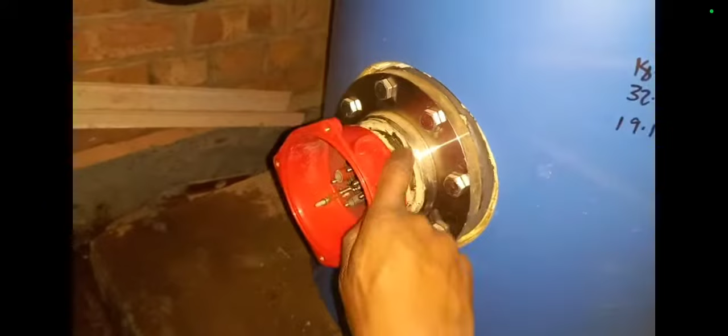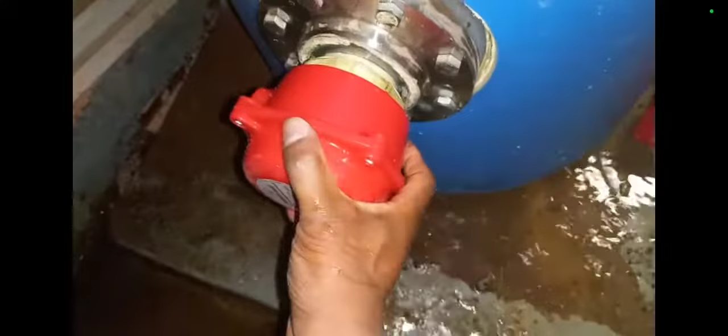I was draining down this calorifier in order to change a three-phase element, but it was taking a bit of time, probably half an hour to an hour, and it was still not even there yet, so I just decided to snatch it. I had my Loctite on here and my jointing compound already prepared.

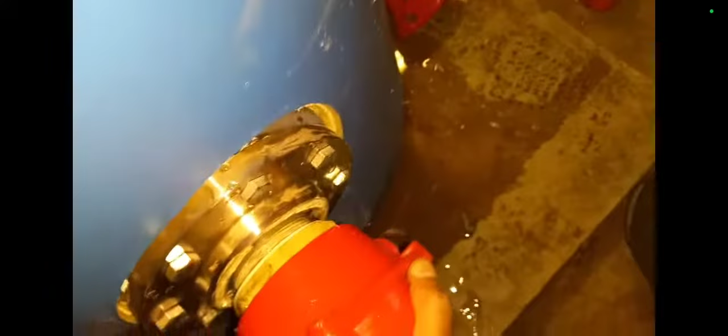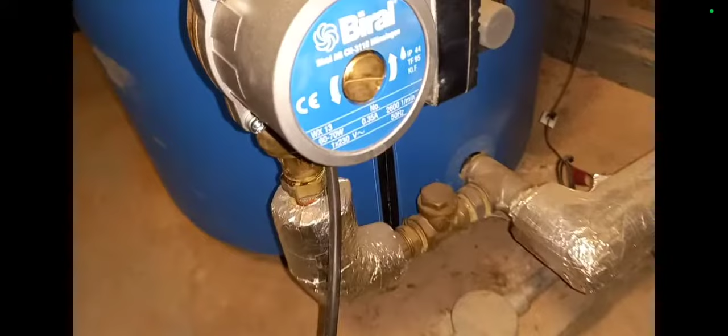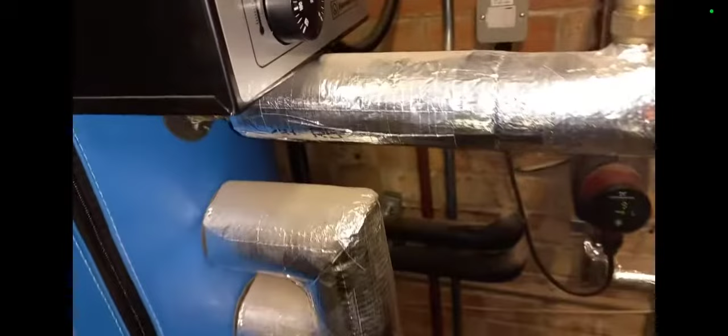Alright, here's the destratification pump. The destratification pump is there to create an even temperature between the top and bottom of the cylinder. Some people call it top to bottom pump. A few more components, PRV out there, and there's my isolation valve. Let's hope they hold. I don't know if they were holding, to be honest. As you could see, I had been draining for a little while. Maybe if I just waited a bit longer.

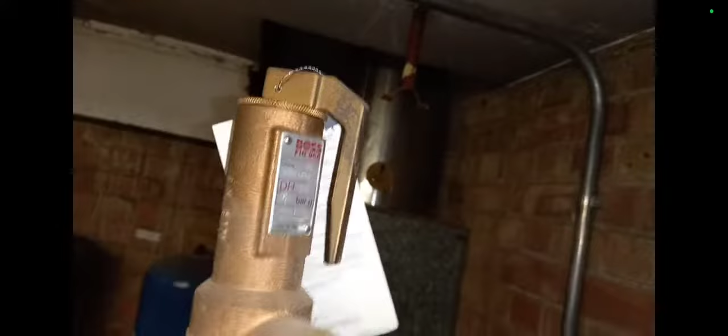And yeah, there's a fuse and also an overheat stat in. This shows you what there is. And then here is the Hamworthy cylinder details. 292 litres. DN25, diameter nominal 25 for the PRV. And there it is, going down there.

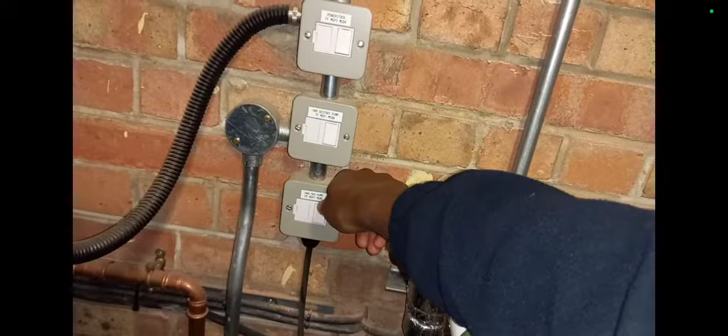So I isolated the power to the D-strat pump and to the return pump. So there's the return pump over there in the control panel. Gonna switch things off as well. It's good to have 2 points of isolation if possible. So when you're doing safe isolation, try to have 2 points of isolation.

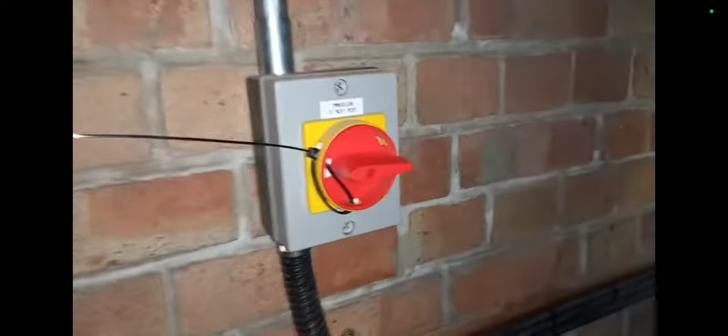And it's good to label up things when you diagnose that something's not working, say 2 or 3 boilers in a plant room. There's my second point of isolation. Try to put labels on things for other engineers when they come into the plant room.

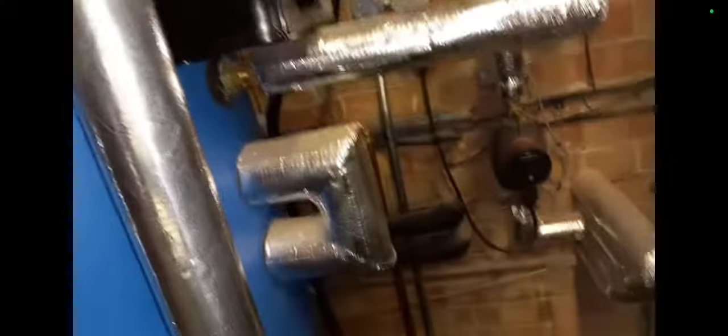Okay, time to isolate our valves. Try to remember to open up valves slowly when reinstating, instead of throwing them open. Closing them can kind of be quick, but opening them up, I forget at times when I open up valves very quickly, and it can cause a big shock to the system and things can pop. So just try to remember when reinstating to open valves slowly.

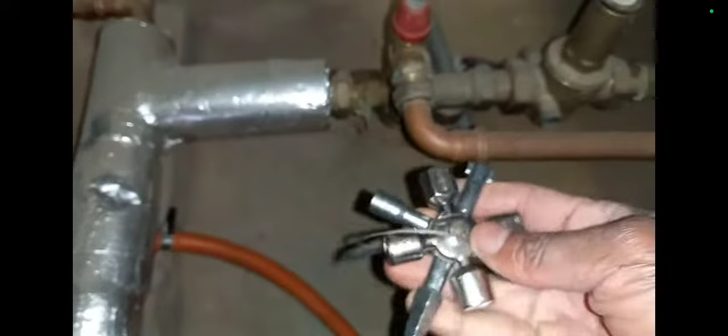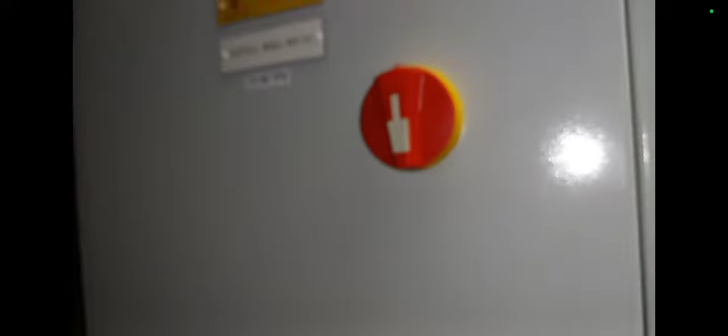So there's a few ways in some of these control panels. Some of the doors and the isolators actually work. So in this one, it's just underneath. You just give it a little poke, and then there you go, you get inside. My immersion heater, I'll flick this off. Even though we've got the local isolator off, I'm going to just switch this off too. Against the left, next to my neutral bar. That's off now. We still need to check for isolation.

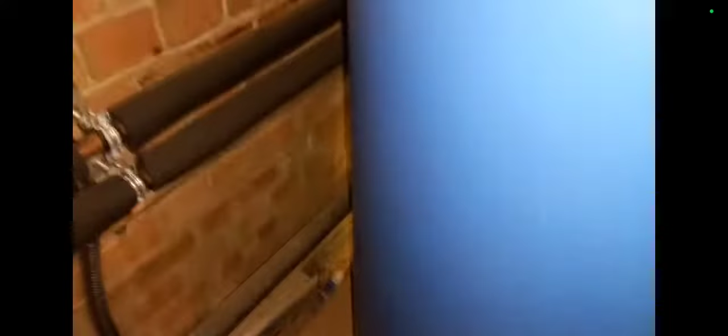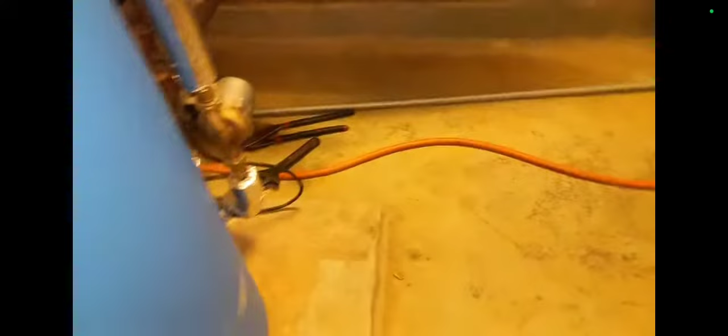Notice I've got my boots on. When working on electric, try to make sure you've got a decent pair of rubber boots on. I'm also using my volt stick, and I'm going to test my volt stick first to see if it's actually working. I've got 2, one's not working. Notice there it's working. Okay, great. I've tested it on a known source. And I'm going to go in here and just make sure there's no power.

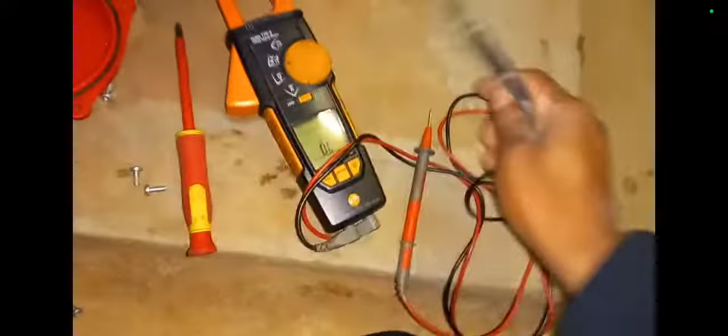And then I'm going to get my multimeter out. I should have a proving unit for my multimeter to make sure that my multimeter works. My proving unit is in the van, but I could just prove that my multimeter is working another way. It's better to use a proving unit, okay? But I'm just showing you, if you do not have a proving unit with you, this is a way that I test my multimeter.

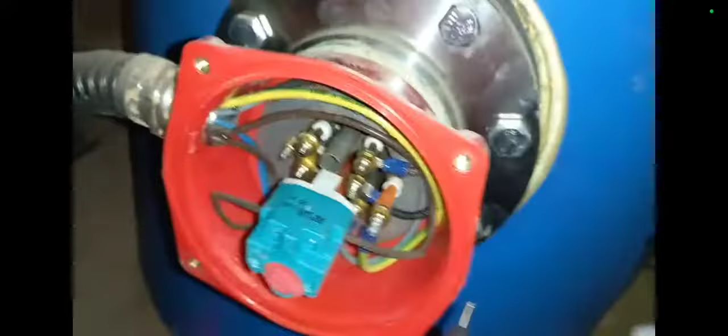Okay, this is another way of checking that my multimeter is working, because the leads may not be in, the leads may be damaged. Make sure that your multimeter is working. I'm convinced that it is. You should still check after you've tested that there's no power somewhere, or that there is power somewhere, etc. Just check that your multimeter is working afterwards.

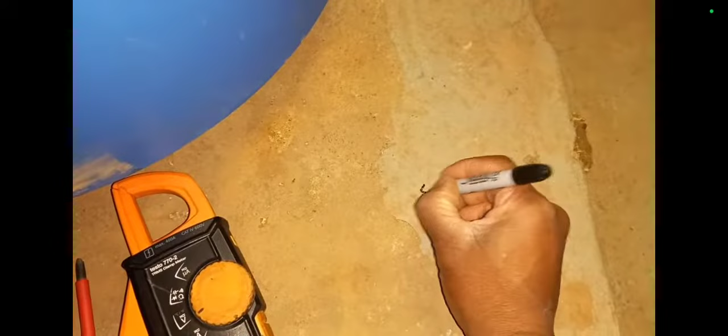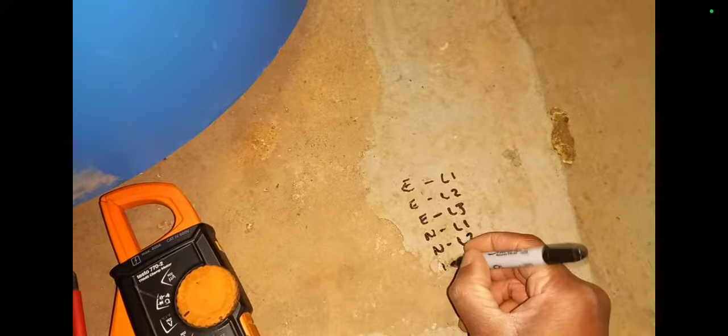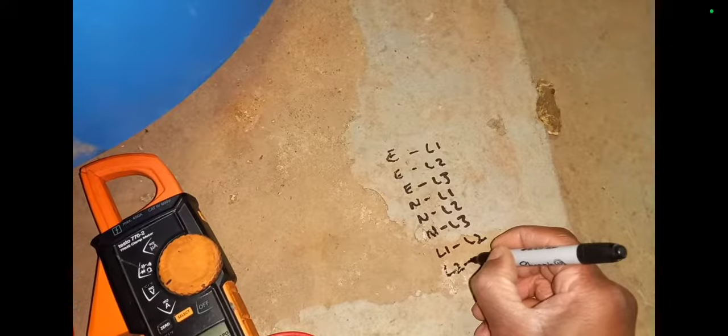10 points of isolation I'm going to write down here. Here we go. So your 10 points of isolation when you're working on 3-phase. Okay, so I've got my earth. I'm going to test from my earth. You want to call it out? Earth to live 1. My earth to live 2. My earth to live 3. My neutral to live 1. My neutral to live 2. My neutral to live 3. What next? My live 1 to my live 2. Live 2 to live 3.

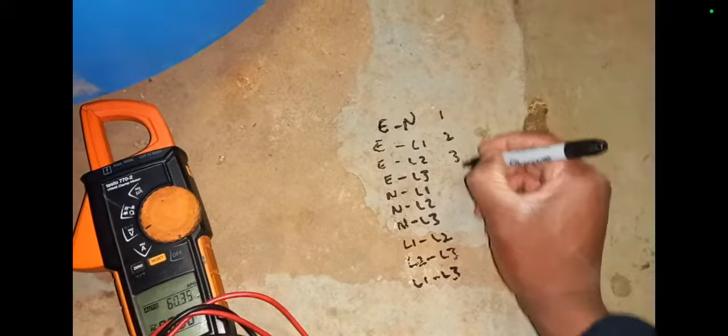Live 1 to live 3. 1, 2, 3, 4, 5, 6, 7, 8, 9. I'm missing one. What is it? Can you guess it in time? My earth to neutral. So this is my 10 points of isolation. 1, 2, 3, 4, 5, 6, 7, 8, 9, 10. So remember, that's how you check it's working.

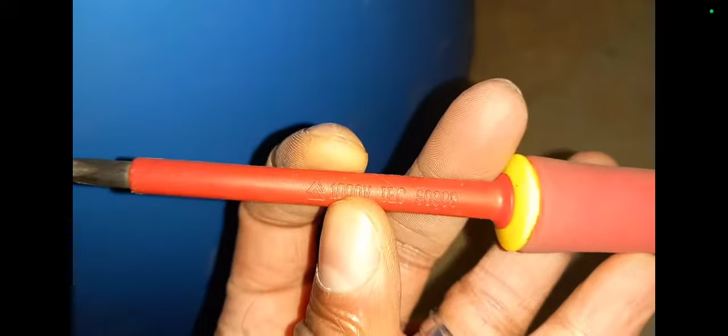So with your hands, try not to use your bare hands when you're working on electric. Try to wear gloves. And also use VDE rated screwdrivers up to 1,000 volts. I've got a cheap pair of Drapers. And also side cutters and long nose pliers, you want them to also be VDE rated. And treat things like they're live, okay?

So that's locked. Also the plant room's locked, okay? So I'm locked in the plant room, so nobody can come in so easily and turn things on whilst I'm working. All right, so 2 points of isolation at least, and on the panel I've turned it off. I've removed the leads from the thermostat. I've locked the door to the plant room so nobody from the public can walk in and just turn the power on.

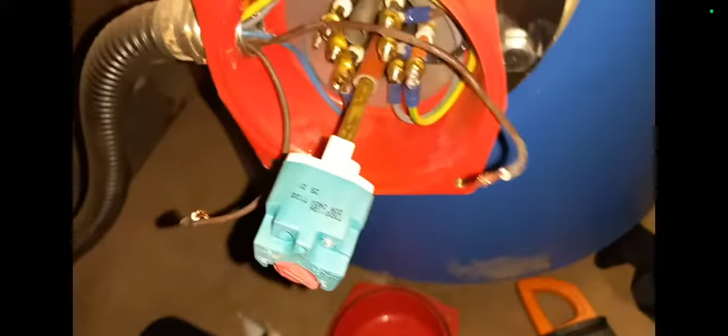The powers that be in the building know I'm in there. Always let someone know that you're working. When you're on your own, make sure that your partner or your colleague or somebody knows that you're somewhere on your own, and if they don't see you by a certain time or hear from you within a certain amount of time, there's nothing stopping you from doing your extra measures when you're doing safe isolation.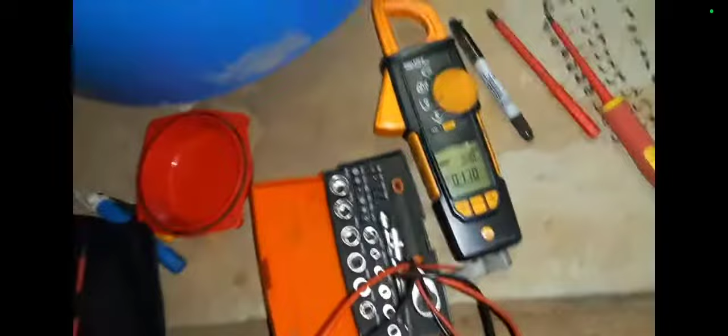So I don't know if you can see my wires being marked, so take pictures of your wires and mark them as well clearly so that you can identify them, or use tape. I think scribes with a marker pen can help at times, but you can wipe those off. So here I am checking my earth to neutral, and that's the voltage I've got there.

So I'm going to write down what I had. So 0 volts. Earth to line 1. We're going to call line 1 up here, this one at the top. Earth to line 1. Voltage 0 volts. Okay, I've checked the other ones, and now I'm going to swiftly move on.

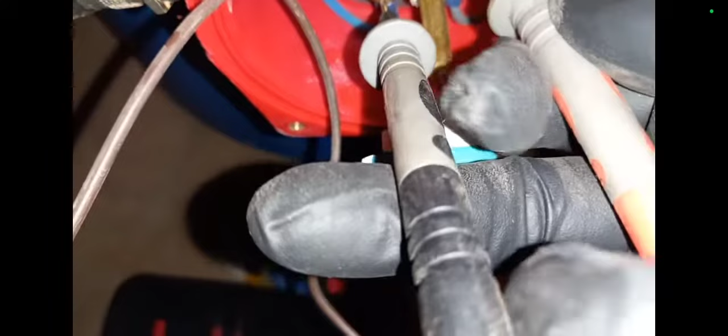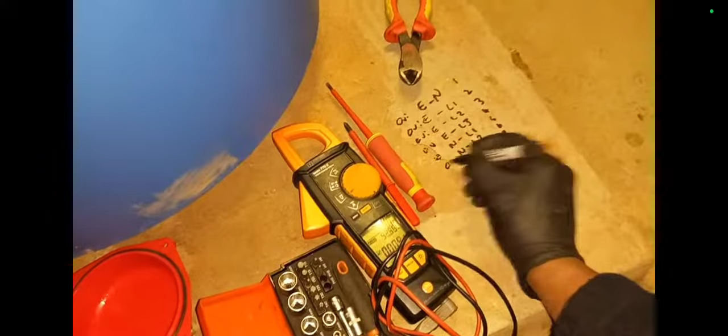I'm going to check my neutral to my live 1. So you get the gist of me checking the other parts. So I've swiftly moved on now. So I'm checking neutral to live 1. And then I'll do neutral to live 2. And neutral to live 3. So I'm continuing to check for safe isolation. Then I write down what I found, and then I'm going to do live 1 to live 2 and so on.

So I started whilst there was still water in the system. As there's still a bit of weight in the system, it's better to just loosen up the element whilst the cylinder's still heavy and you've got something to work against. I'm moving all my parts out the way to stop them from getting wet. There's one I prepared earlier. So here I have my Loctite on there, my paste.

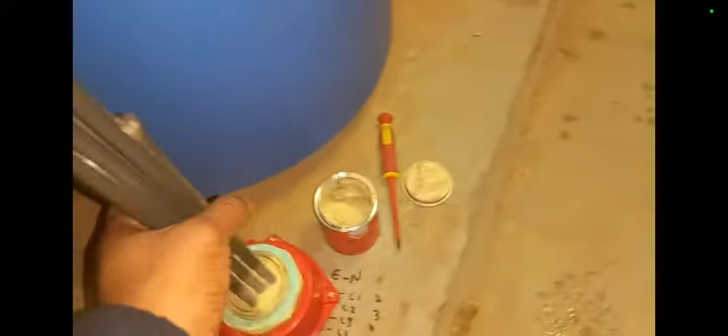Okay, now fast forwarding again to having the unit in situ, the new element. So I've got the system filling up whilst I am going to wire this up. I have wired up my phases and I'm tightening up. A nut driver would be better for this, but this is what I have on me. I don't have any nut drivers, so I'm making sure they're all tight.

So I didn't use any new connections. I can't remember the name of these crimp connections. So I've used those. I'm trying to make sure that the phases don't touch each other or the earth touch anything.

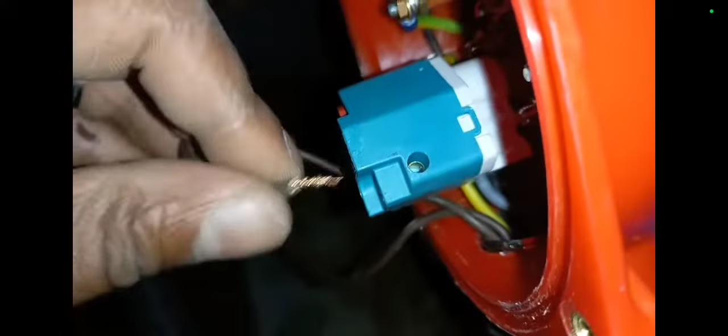Okay, and now when putting in this wire, I'm going to just see how deep it goes inside, and how much space there is, how much movement there is, if it's going to make a good connection or if it's going to just fall out. So the hole looks wide, got a big diameter there, so I'm going to strip this wire back and double it over. So can you see, trying to double it over and pull it inside so that we have a good termination.

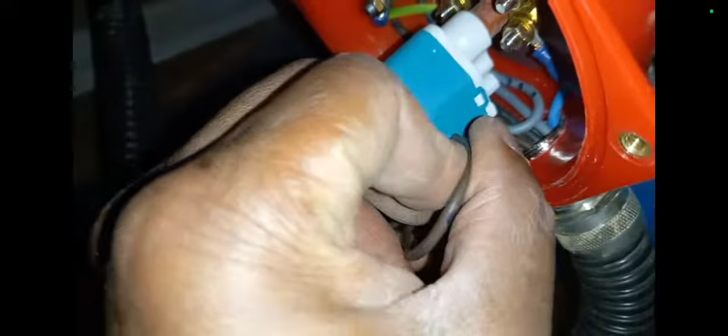I don't want any copper showing, I don't want any of the wire showing on the outside. So here we go. I've got the left in, left and right, making sure it doesn't come out, and also that I don't see any copper showing. So I'm just doing a last little recce to check. Look, I just found something loose. So always double check. But before I turn the power on, I'm going to just check what it says. Okay.

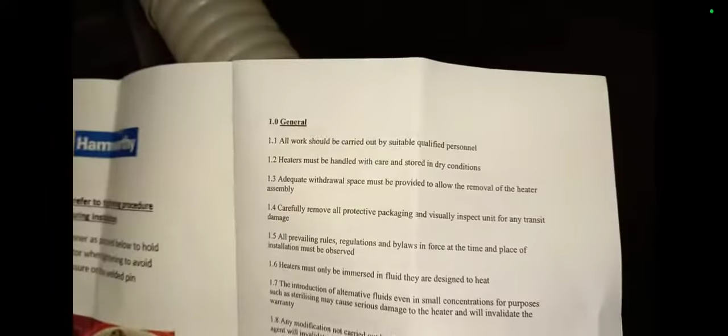Alright, use a spanner. Okay, I used that spanner. I didn't use a nut driver, but a nut driver would probably be more convenient. All work should be carried out by suitably qualified personnel. I hope that's myself. Heaters must be handled with care and stored in dry conditions. You can read along on pause if you want to read any of this. Okay, just skim read it very quickly.

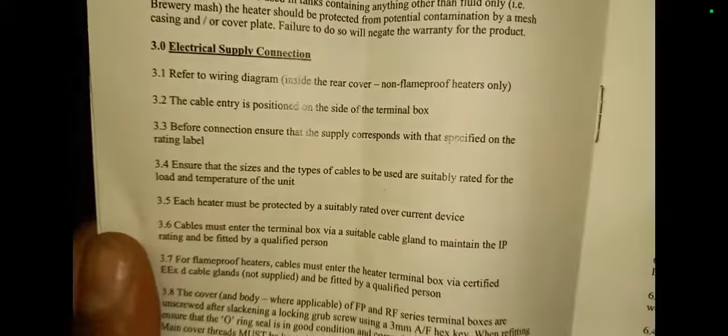Sometimes you can learn things from the manufacturer's instructions. Electrical supply connection. I think when installing, instructions are ultra important to read. Obviously, whilst carrying out maintenance work, instructions are important. But when you're installing, that's where it can all go wrong. Because you're the installer, if you install it wrong, you can have problems for the person afterwards.

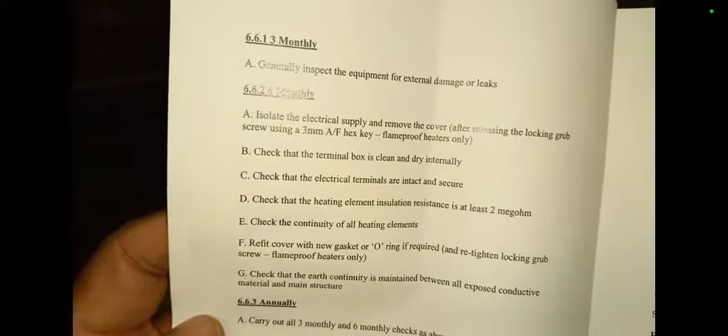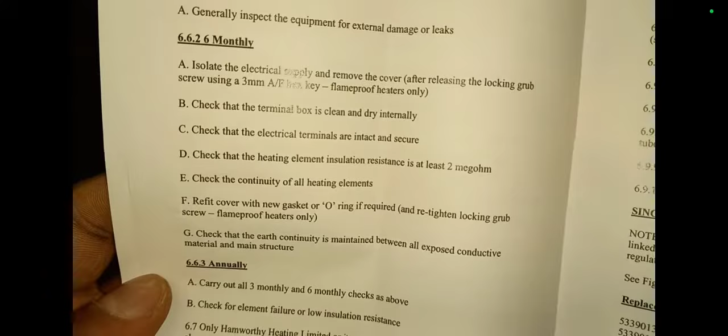Talks about monthly and annual checks. Carry out all 3 monthly and 6 monthly checks as above. Oh, wow. Check the terminal box is clean and dry internally. Check that the electrical terminals are intact and secure. Check the heating element insulation resistance is at least 2 megaohms. Oh, okay. Refit the new gasket or O-ring.

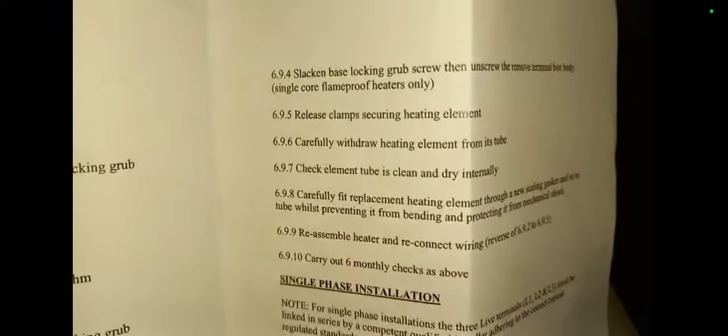Oh, I think I didn't do that. I'm going to have to go and put the O-ring on. I forgot the O-ring, so that's why it's good to read through the instructions. And leave the instructions behind for somebody afterwards as well. Alright, and then the wiring connections here. On the right, Fig 2 is the one we are doing.

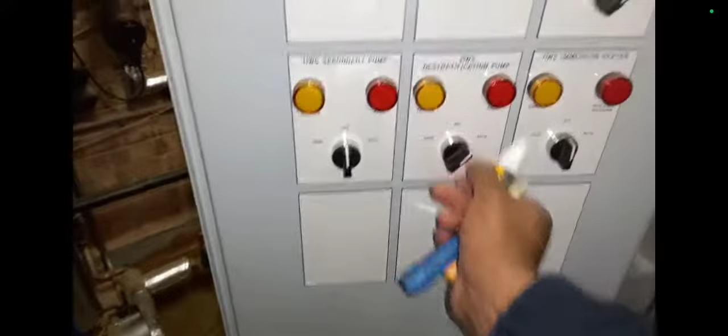Let's get this on. Alright, we've put our other point on. Our MCB is on. We're turning on our pumps. Our destrat. Let's turn on auto. Let's put this to hand in a moment because something strange is going on. Let's put it on to hand. Alright. Make sure that's not tripped. Let's check over on the left.

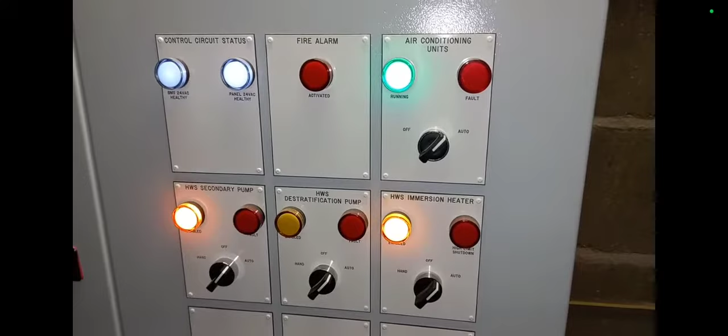So in the comments I'm going to put the way of working out how quickly the temperature should rise based on the kilowatts and the liters. And here we have our return, secondary return, and then it's good to flush some taps because other people in the building may be shocked when they hear the air and the pressure when they open up their taps. So flush some taps, and also the water's been off for a while, so you can do some 5 minutes tap flushing. Moving on to another plant room.

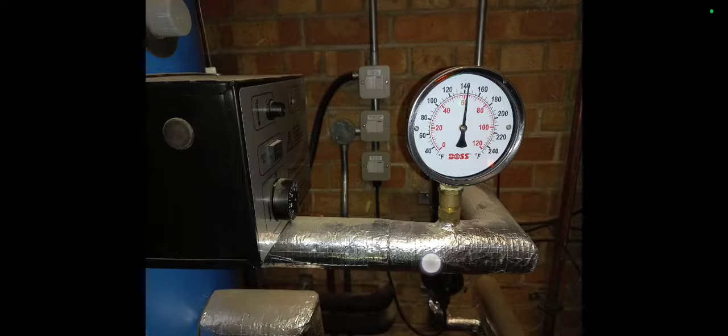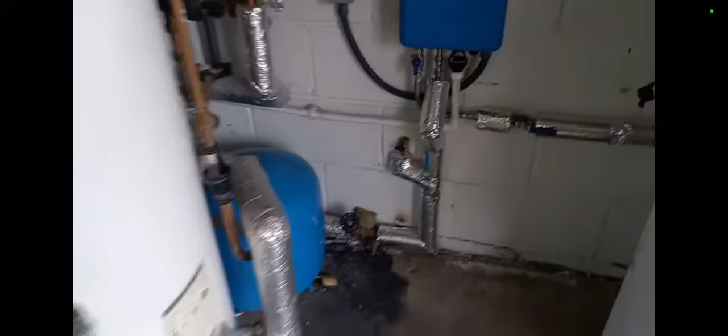So I went to this plant room and I didn't come here to see boilers in lockout, but lo and behold, I just came to get some water samples of the heating, and look, they've got a fault on this boiler. Any ideas of what to do? What would you do next if this happened to you? What would you do? So I just checked the basics, the pressure.

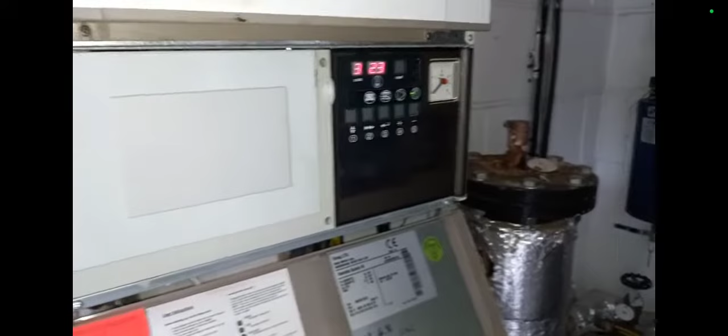I think I looked in the manual to see what that fault code was. So it's a Remeha Quinta 45. I reset the boiler and then it came on. I had a boiler on the left that's off. I found it off. I don't know why it was turned off. There was no label on it. The power was off. No warning notice. Interesting. So I'm watching the temperature rise here.

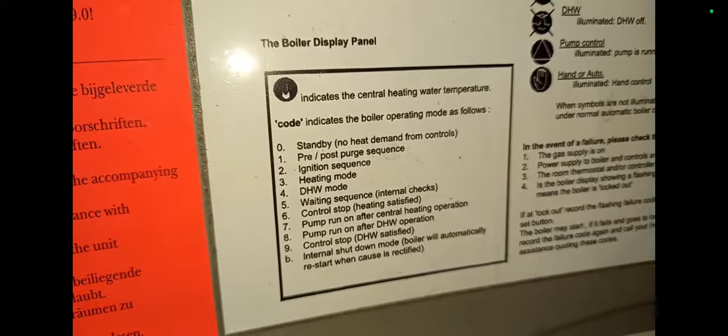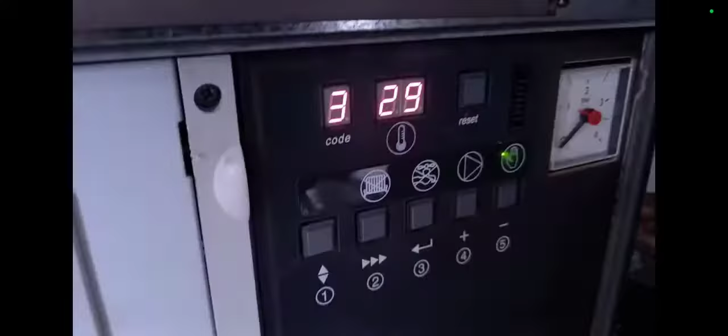And this is the stage it is in. Stage 3, heating mode. I didn't take the case off, so I didn't see any flame. But I can see code 3 means heating on, and I can see the temperature rise. I don't know if these pressure gauges are working on these boilers. That could be the reason why it had a problem, but I doubt it's got 0 bar in there.

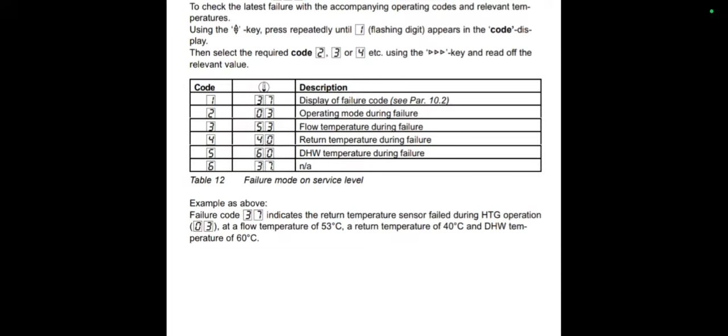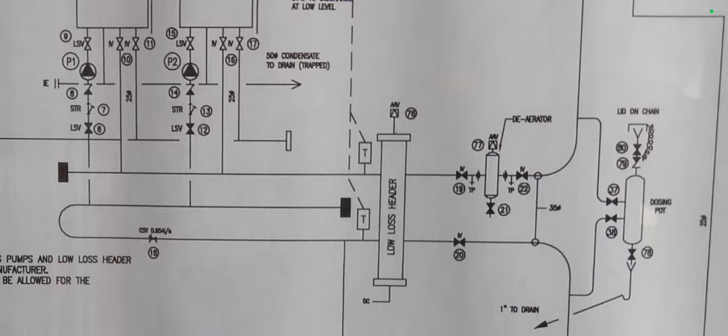STR, that looks like strainer. This is a service valve. They have a chart on the right to tell you what these symbols mean in case you don't know them by heart. Low loss header, so then we've got de-aerator. Sometimes you have air and dirt separators. We've got the de-aerator there. Then here we've got a dosing pot.

Okay, and there's more parts over here if you want to pause and read. You can see these are our Megaflos that we have in the plant room as well. And then over here we have cold water tank.

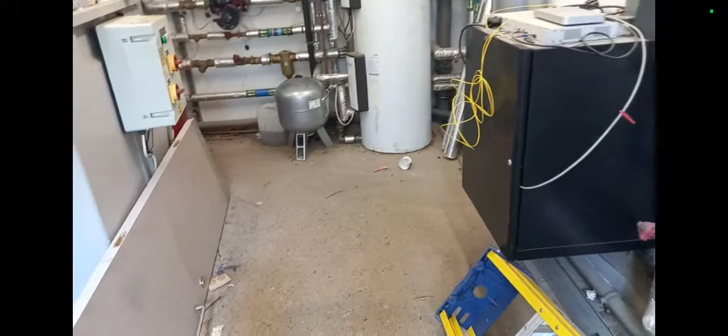Okay, I'm at another job here, and in this site hot water is back on. I came here for a hot water problem. The element, I found it off. I was wondering if it had tripped or if someone just turned it off. This is my hot water pumps, my heating pumps at the bottom. I have that isolated because I was starting to get a bit of heat going through the pumps even though they weren't on.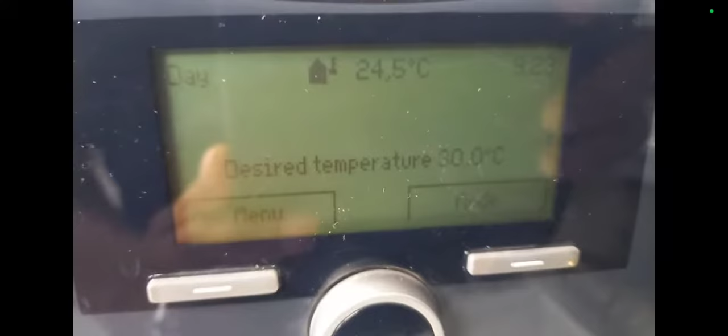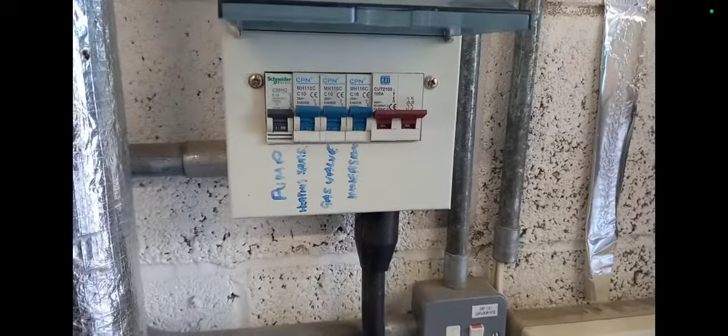And then this is my bad boy boiler. This controller here, let me know if you're familiar with it. So I went to it and I tried to do my desired hot water temperature and turn it up, but it wouldn't work. So I had to turn up my desired temperature to 30 on here, which I believe was for heating. Here's my element over here, my immersion heater, should I say. Okay, so it's gone up in temperature, so the immersion has tripped.

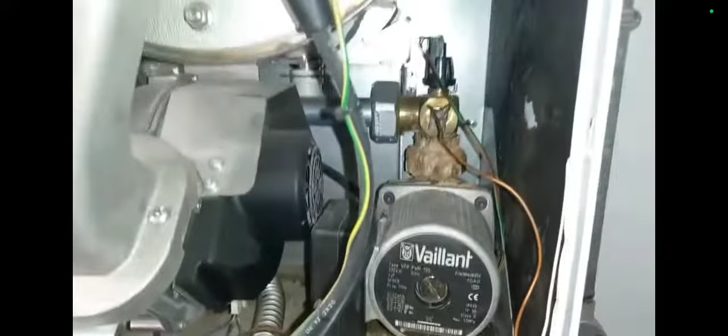This boiler here is a bit corroded. It was made or installed in 2011, and I've been asked to change a few parts in here, but I do not want to touch it because it feels like a setup. There's times where you'll end up on a job where you will feel like you have been set up, and this is one of them. So here we have it. We're draining it down into here, nice and convenient.

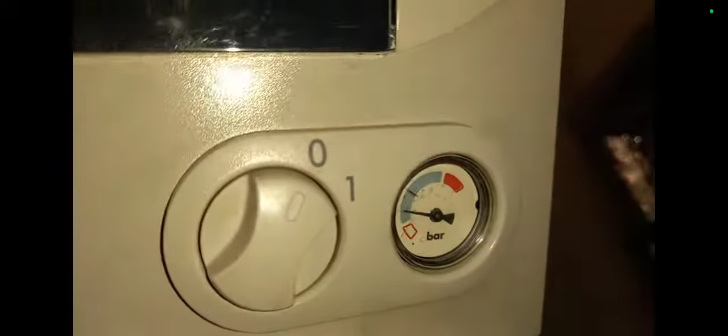But I am going to have an attempt at working on this boiler, but I'm not going to rush in because they have hot water in this building. The boiler is not leaking. It's got signs of a previous leak. You have to be careful not to get yourself into trouble because you can get complaints. Don't do everything just to make money. Be careful because you can cause problems when you do that. Think about what you're doing and if it's logical.

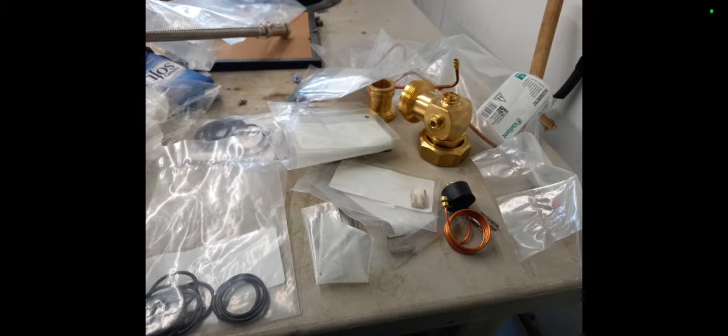So on these, you've got the year here. So it was installed in about 2011, and I believe it was week 43. These are the parts I'm supposed to change on it, but as I started to take this part off, it was too tough. I could have sprayed it, I could have heated it, I could have hit it, but I was getting calls that they wanted the hot water back on, and I didn't have an emergency element working.

It needs to be changed, and if I had my emergency element, I could have just turned the element on, kept them with their hot water, and then worked in peace. But don't work under pressure unnecessarily, and think about what you're doing, what the point of what you're doing is. That's the advice I'd like to give you. Don't think money, money, money, because you can end up in hot water. You can end up in problems. This is the element. It was 3 kilowatt. It's working on this boiler.

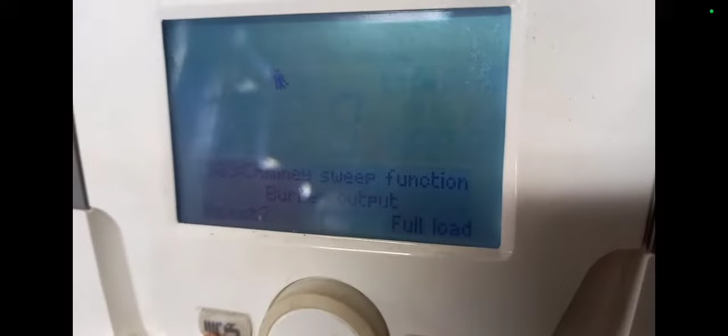Haven't worked on it in a while, and I had to remember that you have to press left and right to get it into high and low fire, and then it will give you an option of partial load or full load. And then here we go, you have to press this button and then it starts flashing. You can turn to full load and then press, and then it should go into full load or partial load.

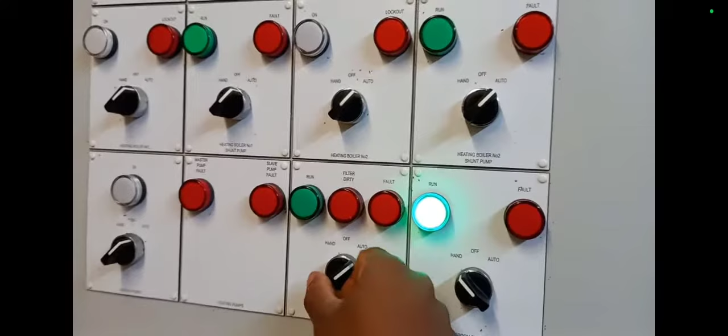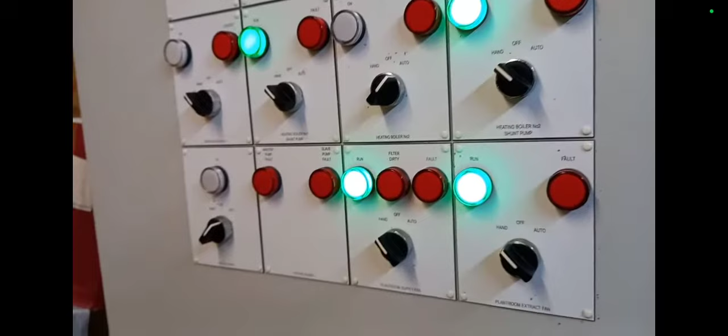And always remember to turn the temperature up on the boilers, the desired temperature on the boiler, so it doesn't cut out too quick. You need to do it on many boilers, and get your pumps going, get your extract and supply fans on, because the boilers are probably interlocked. You can sometimes get boilers into service mode even without the extract and supply fan being on, and the boiler will come on. But with a natural switch live, the boiler won't receive a switch live when the supply and extract fan's not running. It's interlocked.

So here we have it. To stop the boiler from kettling, we need to have the pumps running, so we need to force them on. Also the heating pumps as well, and so on. Put it all in hand. And remember to put it back.

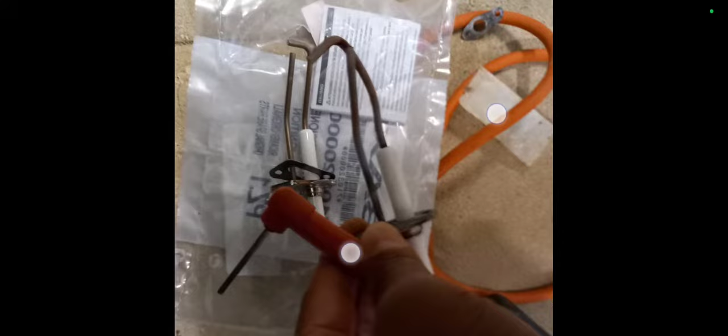On this particular boiler, I had these probes here that were completely corroded, had holes in them, and I changed the probes. You can see the detection there, and you can see the spark there, the condition of it, how different it is. Do you spot the difference? I changed that, and I checked my lockout button that it was working, my safety lockout. There's my solenoid, which activated.

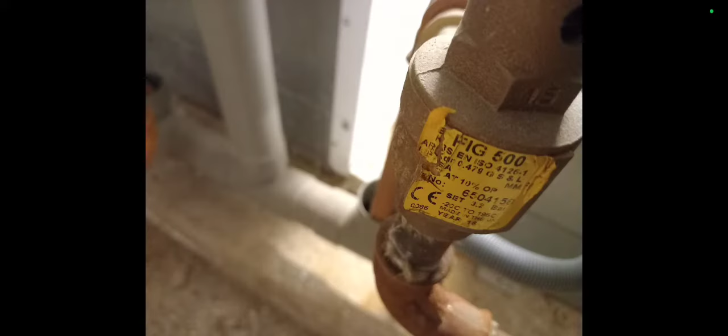And my PRV needs to be changed because of the year, and every 5 years or so, due to insurance purposes, normally they need to be changed, so this one has to be. It's got my DN number there, DN diameter nominal 15, my bar 3.2 bar, and then leave everything afterwards as I find it, not in hand but back into auto.

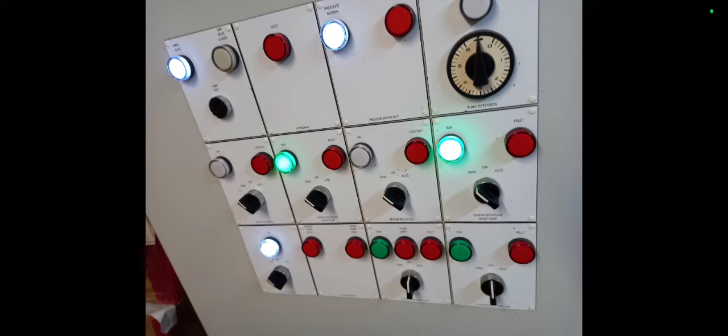And there's my supply. I had to use my anemometer on the supply low. This is the extract high, so I can check up here. It was 5 meters per second, I believe, or something like that. 5 m/s on the low air inlet, and then it was about 2 on the extract.

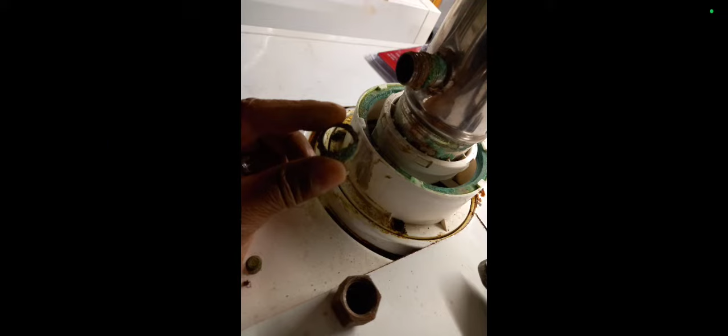And this was the hole in the flue. I mean, carry your plugs and caps with you. Make sure you've got various sizes when you work in the commercial field, and get your company to order you some. And there we go. It had a hole in it.

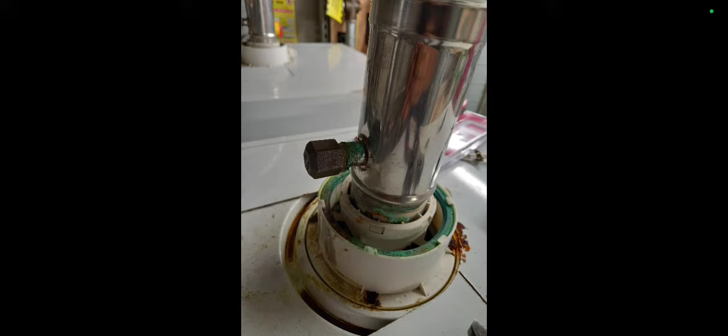This will probably corrode. I think it may be because the boiler is working at a low temperature for an efficient condensing mode, but I reckon if you turn the temperature on the boilers up higher, potentially it may not corrode as much. Give me your ideas on why you think there's so much corrosion around this flue. I think it's because it's working a lot in condensing mode, so a lower temperature, maybe 50-60 Celsius rather than 70 to 80. Or something to do with the traps not being properly operational, or not enough traps in there. But let me know in the comments below what you think was causing this problem.

Check your carbon monoxide alarms are in date. Test.